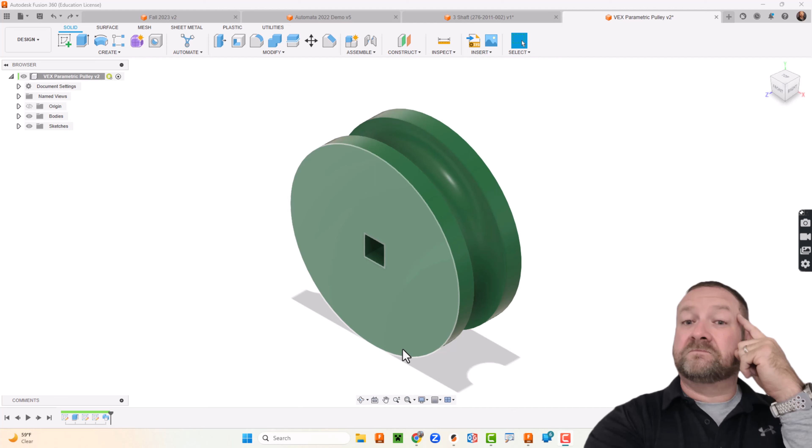I'm going to take you through a parametric pulley. A lot of times this comes in handy, especially for us VEX Robotics people.

So this is a 3D printable. Right now it is set by default to be about 3/8 thick. And then we've also got a square hole here.

Now it's important that we leave that a little bit bigger. You notice it is 0.13. The actual measurement of a VEX axle is 0.125. So it's slightly bigger to allow for that 3D printing process.

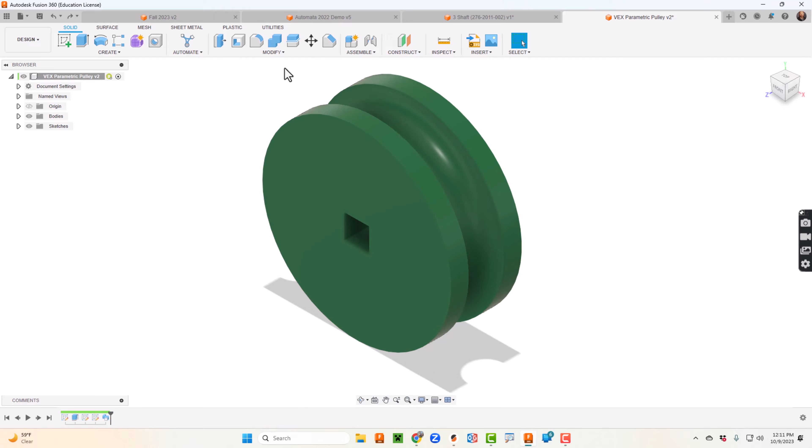To go ahead and change some of these values, you could go to modify and change parameters. And when you do, I'll try to get this zoomed out so we can actually see these side by side.

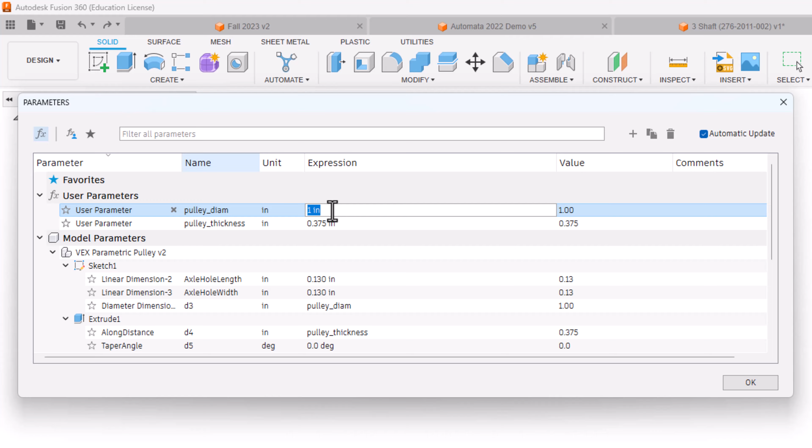Perhaps I need a bigger pulley. Maybe I need a 2-inch pulley. I can go over here for the pulley diameter and press 2 and press enter. And you notice the pulley grows, the square hole stays the same size, everything else kind of grows accordingly, okay?

Perhaps I need it to be a little bit thicker. Maybe I need it to be a half inch thicker. Right below there's pulley thickness, and I can change that maybe to 0.5. And you can see everything goes the way it's supposed to go.

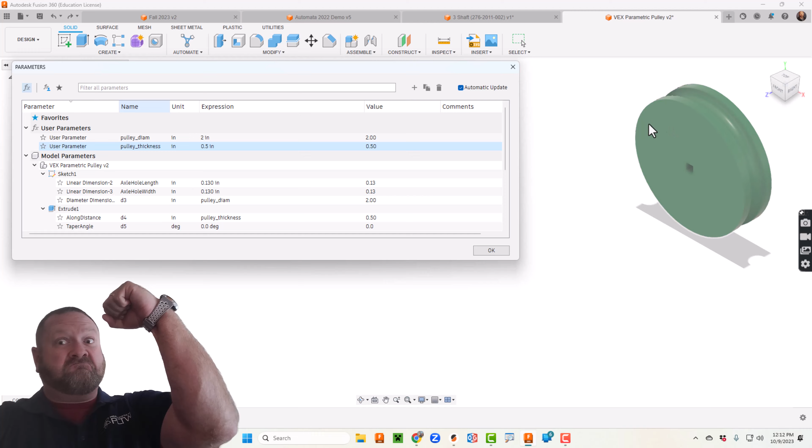But perhaps I messed up and this is only supposed to be 1.5 inches, so I could put 1.5 there. Everything scales the way it's supposed to. So by default it's at 1 and the thickness is at 0.375. That'll take you back to the original.

One other variable that you may need to play around with is right here, this axle hole length and axle hole width. That's where I set the square hole here to be 0.130. And I've found that works pretty good on our printer.

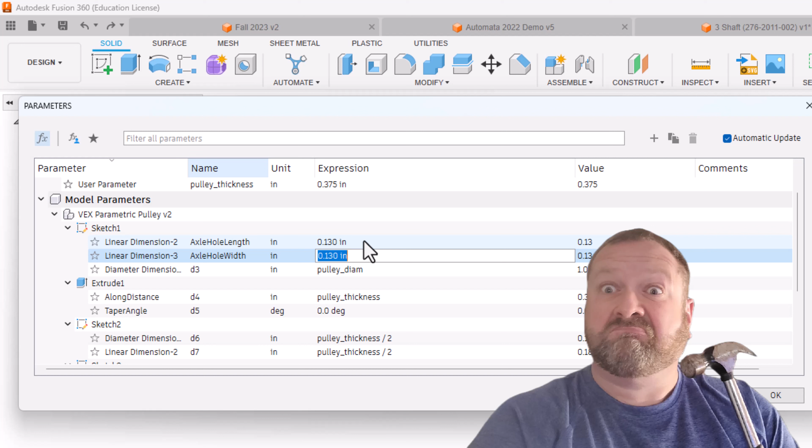If you print one of these out and it's really tight and you're having to hammer it in, you may want to increase this value. If it's too loose at this point, then you're going to need to decrease that value a little bit.